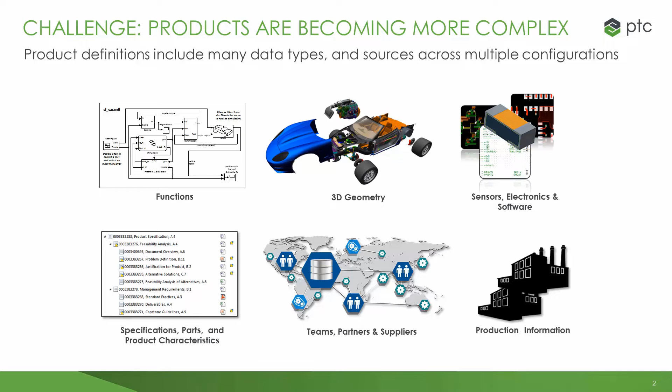Errors in this crucial part of the product definition lead to delays, frustration, cost overruns, scrap and rework, and poor quality. Many roles are involved in the creation, editing, and consumption of all this essential product information.

If you just consider the design functions alone, there are many teams that will be involved, from mechanical to electrical to software and to quality. Beyond that, there are many other people who either contribute to or consume the information in the engineering bill of materials. This list can grow, and it includes other teams such as manufacturing, marketing, sourcing, sales, and many others.

If you were to map out all of the roles across all the different processes, you'd create quite a matrix of interaction points. Today, many companies struggle with sharing information across these points of interaction due to all the different systems and tools and data types that are used.

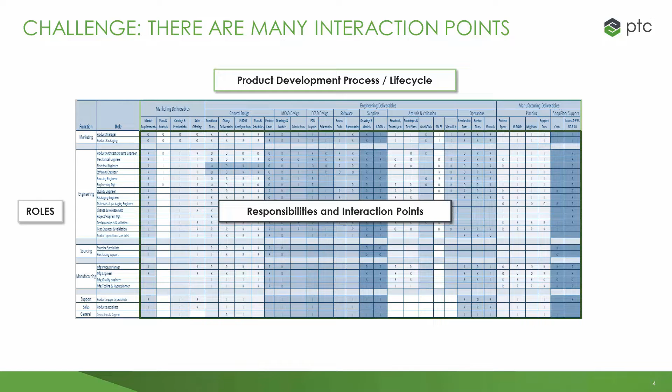This creates many challenges, such as manual translation of data, updating of multiple spreadsheets, not knowing which is the latest version, etc. One customer that we spoke to told us they had 29 different spreadsheets across these functions.

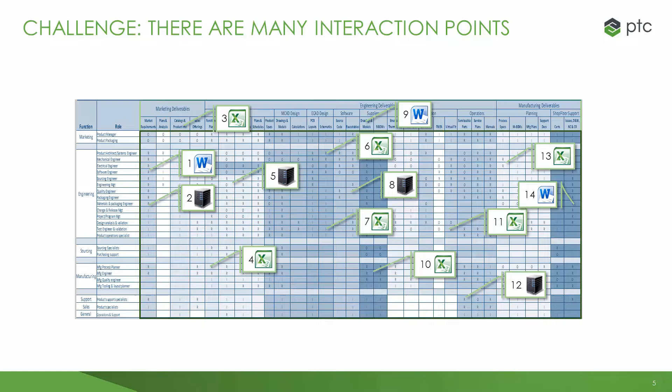In the absence of a comprehensive system for the creation and management of the engineering bill of material, companies have adopted several different approaches. Let's take a look at some of them.

The traditional approach is to include the bill of material on the engineering drawing. This practice evolved naturally with the evolution of paper drawings, but like many paper-based processes, it comes with some significant limitations. The media on which the BOM is created may have changed from drawing board to CAD, from paper to electronic, but the fundamental process has not changed, and that represents a significant bottleneck.

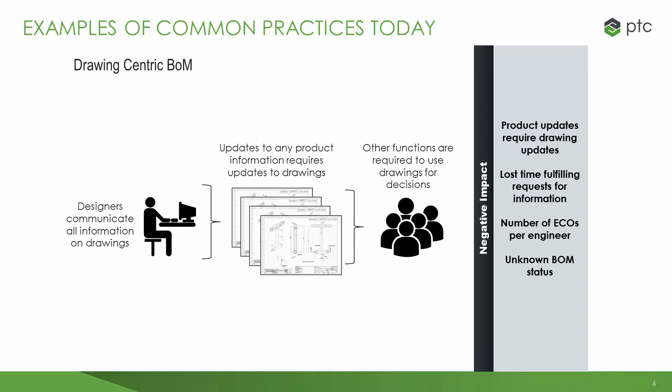We'll take a closer look at the problems that this creates later in this presentation.

Another common practice is to copy and reformat the BOM that is created in engineering into a form and format that's more useful for downstream functions. Often the different formats are sent from person to person via email, resulting in several copies being in circulation. The problems arise when changes need to be made.

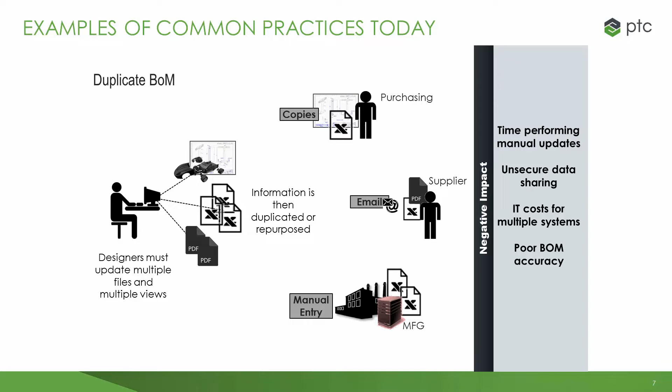Now all of those existing BOM documents have to be chased down and updated manually. This is time-consuming and error-prone, and often results in some people working on out-of-date and therefore incorrect information. In many cases, there simply isn't a standard process for creating, updating, and sharing bills of material information within engineering and within the downstream functions.

The problem's often compounded when companies have grown through merger or acquisition, and as a consequence use several non-integrated processes, some based on paper, some based on emailed spreadsheets. This all leads to delays in the schedule, decisions being made on incorrect or incomplete information, and Herculean human efforts required to assemble a complete bill of material from several sources.

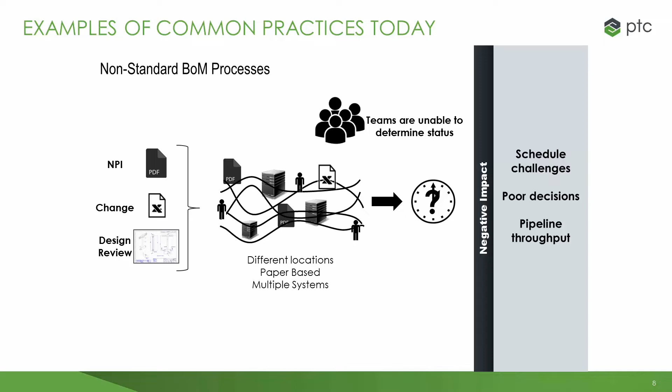Now let's take a deeper look at just one of these approaches, the drawing-based bill of material process. And we'll ask ourselves, what's the problem? And can the process be improved upon?

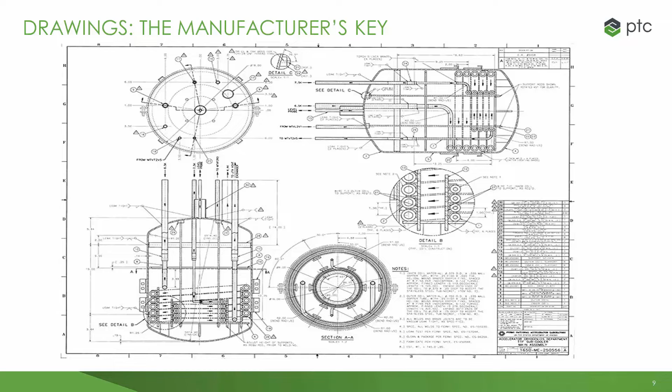Here's an example of a typical assembly drawing, where the bill of material table is placed above the legend on the right-hand side of the drawing. This approach is common, and it has some advantages, and it's been used successfully for decades.

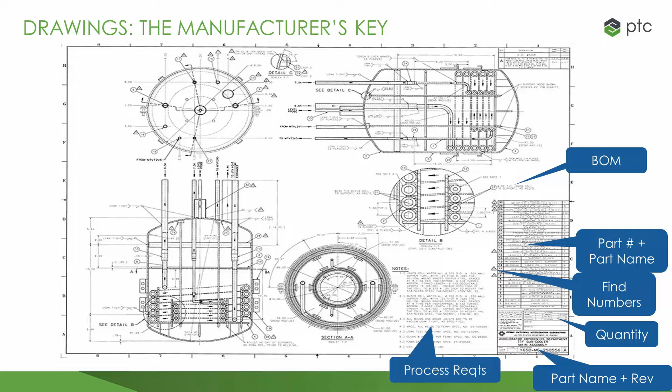But there are some inherent flaws with the approach, which result in a lack of the agility that's required to support today's fast-paced product development cycles. If the goal is to manage a bill of material that is complete, accurate, and reliable, then this is not the way to achieve it when speed and scale really matter.

When all engineering information is centered on the drawing, the process is a two-stage process. Firstly, there's a composition process in which information such as material specs, critical dimensions, parts lists, etc., are all gathered and arranged on the drawing. All of this information must be defined and complete and then transcribed onto the drawing before the drawing can be released.

Secondly, there is the decomposition process, where the consumers of the information must read from the drawing to interpret and extract just the information that's relevant to them. The drawing now becomes a bottleneck, where none of the downstream consumers can receive any information at all until the composition of the entire information set is complete and the drawing is released.

This process constriction is exacerbated when any of the information on the drawing changes. If there's a quantity change, the drawing must change. A process change, the drawing must change. Part number change, the drawing must be changed. Replace a part, the drawing must change. Change a find number, the drawing must change. And so it goes on.

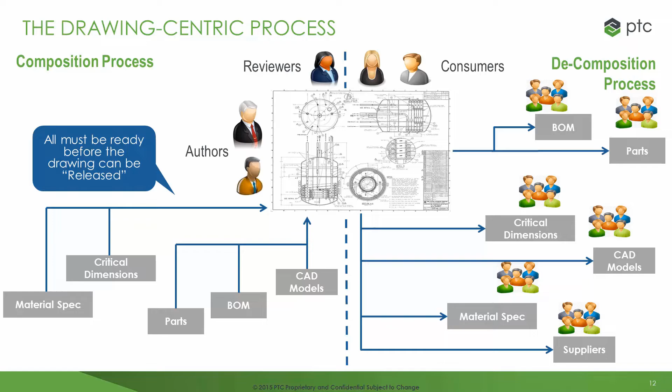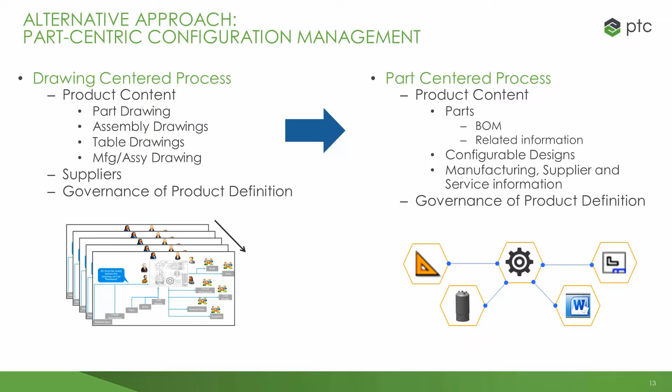If, instead of composing all the information onto the drawing and making the drawing the single pipeline of information, let's see what happens when each piece of that same information is managed independently in a part-centric process in Windchill PDM Link. The same information is created in both processes, but we'll see how the part-based approach avoids the bottlenecks associated with the drawing-based approach.

In this case, information is composed and released as soon as it makes sense to do so. We don't need, for example, to wait for the material spec to be complete before the BOM is made available. In fact, there's tremendous value in pre-releasing an early bill of material that may just identify the long lead time items so that purchasing can begin their planning process with an understanding that the rest of the bill of material is preliminary. This parallel process allows for greater agility while removing bottlenecks and ultimately faster time to market with fewer errors.

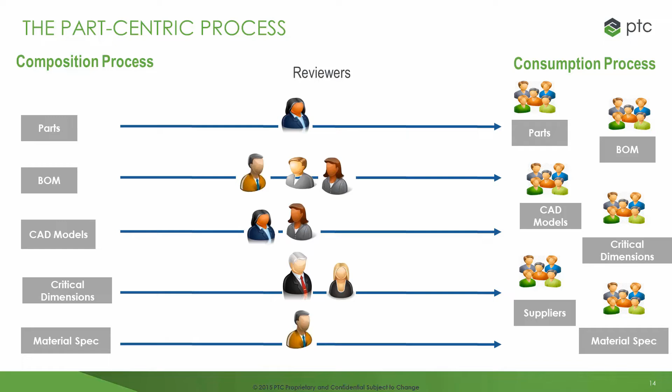Windchill PDM Link provides a part-centric, associative, multi-user bill of material that is a complete definition. We call it an associative BOM because each item on the BOM can be directly linked to all other information such as documentation and CAD models, and it's all managed as a single source of truth.

The associative relationships are created as a natural part of the development process and live with the bill of material throughout the life cycle of the product. The bill of material and its related information is updated as a result of further development or engineering change processes using standardized automated workflows.

And it's accessible to downstream consumers to view the information that's relevant to them at just the time they need it. This results in tangible business outcomes for both the designer and the enterprise, where designers can focus on the design and spend less time searching for information. Parts are reused rather than recreated. Processes such as new product introduction, release management, and change management are optimized, automated, repeatable, predictable, and driven by workflow.

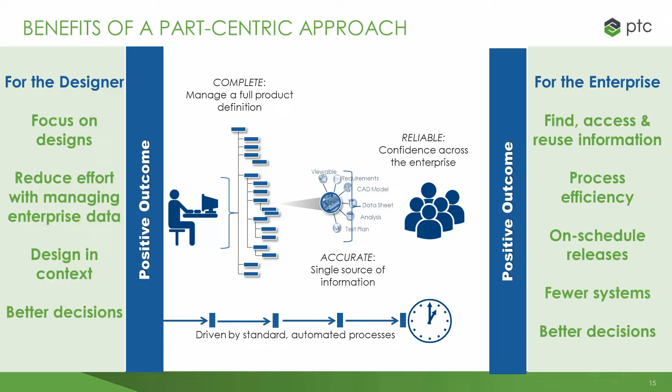This results in better revenue prediction with on-schedule releases and better decisions by everyone, because everyone is using the same single source of information, resulting in less frustration for the team, less scrap and rework, and high-quality products. The Windchill bill of material is complete, it's accurate, and it's reliable.

Let's take a look at how one of our customers, SRAM, used a part-centric approach to address an otherwise unsurmountable engineering problem. SRAM designs and manufactures high-quality components for the bicycle industry.

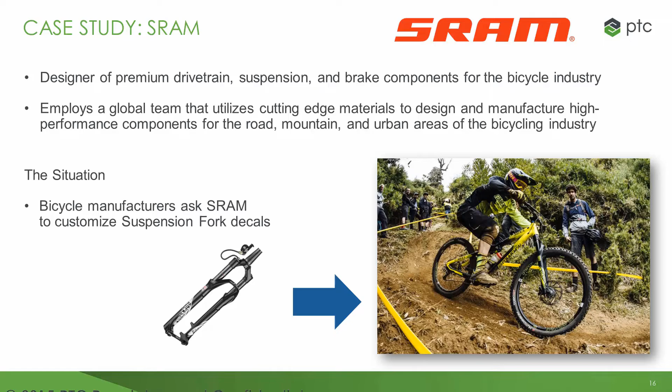When a SRAM customer orders one of their components, they need decals and colors specific to their own branding. The old process for such decals was a drawing-centric process. In addition to the decals themselves, there was a drawing with a table that had a row for every decal kit, as well as for every fork drawing, there was information on the decal kit.

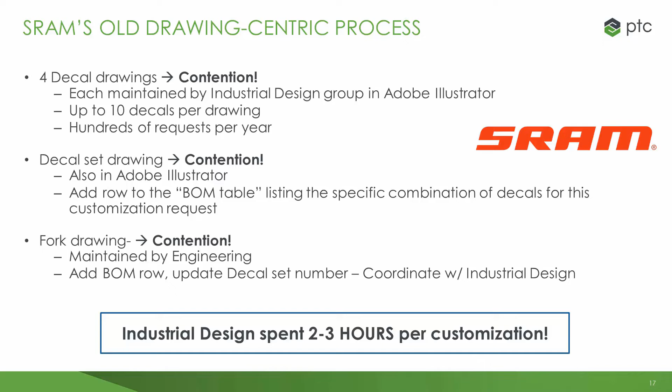SRAM would receive many orders from customers for a custom decal. In this drawing-centric process, they had to update and revise the drawings to add the decal kits, and then go through a change process to reissue the drawings, potentially hundreds of times. Each time, users have to wait for the drawings to continue the process.

By switching to a part-centric process, they now create parts in Windchill PDM Link to represent the decals, and then relate the Illustrator files to the decal parts. They can then very quickly create new parts and a new bill of material for the decal combination. There's no waiting for drawings to update, and the downstream roles now have rapid access to the correct information without waiting for the re-release of a complex set of drawings.

This resulted in reducing the time for custom decals from hours to minutes, and has led to a huge increase in the number of orders that they can process in a year.

In fact, an independent study by Nucleus Research showed that SRAM have gained tremendous value from their deployment of Windchill PDM Link with an annual ROI of 128%, 12 months to pay back the initial investment, and a $1.3 million annual benefit.

Another great example of a customer that's revolutionized their process around bill of material is iRobot. iRobot are well known for their home use robots. Having a single bill of material that's up to date, accurate, centrally accessible, and one which demonstrates the historical development of its products was critical to iRobot.

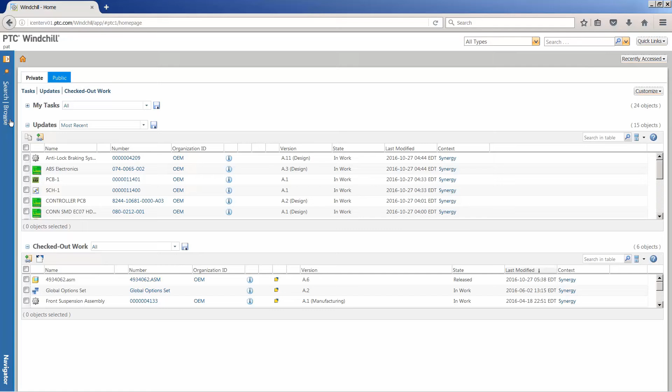Let's now switch to a demonstration, and let's take a look at what the bill of material experience is like in Windchill PDM Link. In this demonstration, I'll show how Windchill PDM Link from PTC provides a complete view of the design, including mechanical, electrical, software, and related documentation, as seen through the lens of the associative bill of material.

We'll use this car as an example, and the first thing you'll notice is that we don't just have a bill of material, but we have a complete, correct, and reliable bill of information. Here we have all of the information associated to the BOM that's used to describe the complete product.

Let's take a look at the BOM structure, which, as you can see, includes many types of data. I can select parts from the visualization pane or the structure pane and see the corresponding parts cross-highlighted.

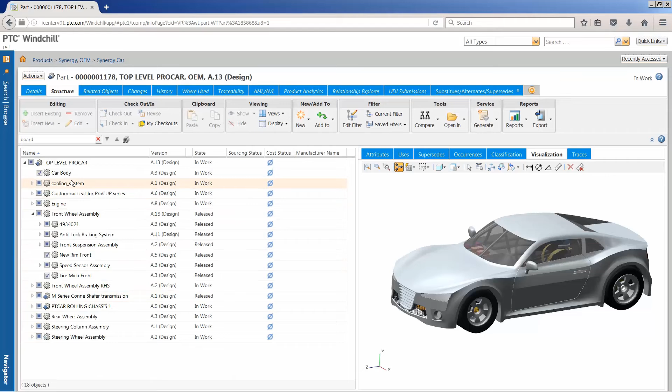Combining BOM and CAD management into Windchill PDM Link allows much of the BOM to be generated automatically from the CAD structure. When I'm investigating an assembly, such as this wheel assembly, it's important that I can quickly view all of the information that describes it.

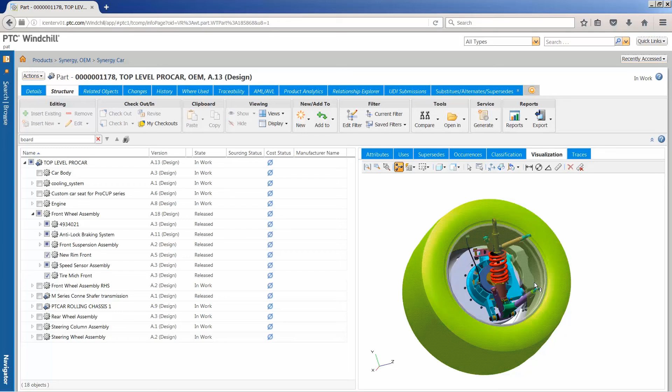In this case, when I expand the anti-lock braking system, you can see what looks like a traditional bill of material. But when I choose to show all related content, you'll see how that is now a dynamic representation of the bill of material or bill of information, which captures all of the digital content of the product as it evolves. From here, I can view all the different information in the product design, such as electronics, schematics, 3D assemblies, drawings, calculation documents, instructions, test results, ECAD, software, and even the plant from which it's to be manufactured. This allows complete traceability to all of that data as the design matures and moves from concept to release.

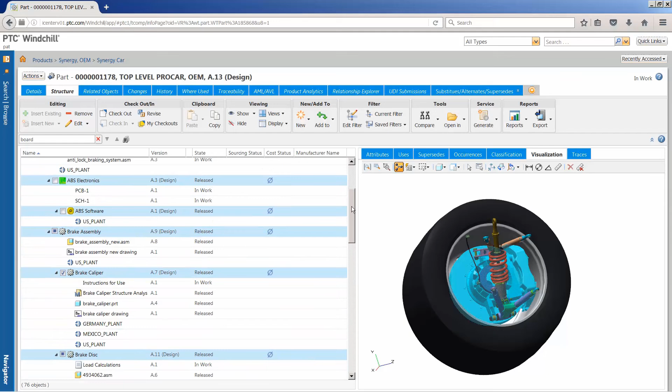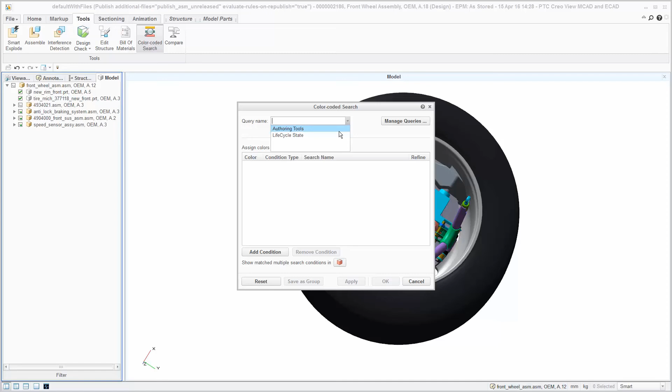Because I have all this information related to the BOM, I'm able to take advantage of all of this information directly in our viewing tool, Creo View. Here I can interrogate, mark up, measure, and even perform color-coded query searches on things such as the authoring tool used for the design, or on the life cycle state of the parts, allowing me in this case to visually see any parts in my assembly that are not yet released.

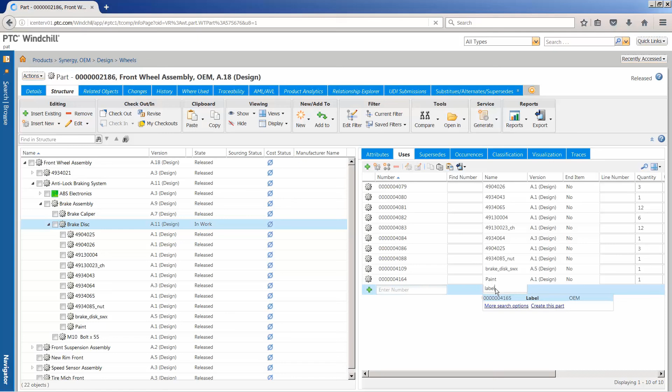I'd like to show you just how easy it is for an authorized user to edit the bill of material directly in the Windchill system. I'm going to add a label to the bill of material. And since the label is an existing standard component, as soon as I begin typing the name, the system searches for and offers me that label as an option.

Once the label is added to the bill of material, you can see that the label, as well as any subcomponents to that label, have been added as well. Since I've changed the structure with the addition of the label, I now need to check this in and document the change.

It's very easy to send BOM and structure information from Windchill PDM Link to other systems such as ERP. This can either be transmitted automatically or it can be exported manually through the export tool, which supports common formats such as XML, XLS, CSV, and many others.

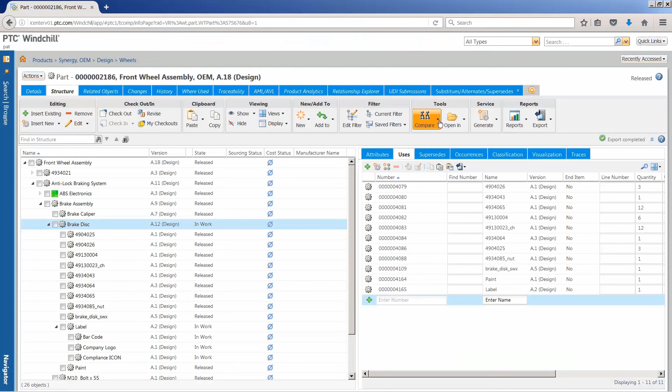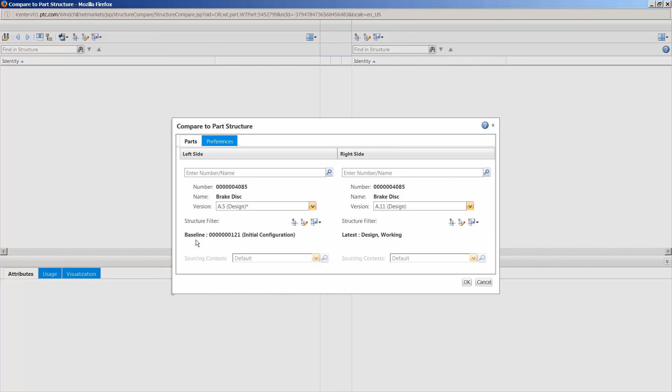As the design changes over time and parts are added or removed from the design, Windchill PDM Link maintains the change history and provides tools to compare the various versions. The BOM Compare tool allows me to easily compare the latest version of the BOM with earlier versions, or even compare the EBOM with the MBOM or the SBOM.

In this case, I'm comparing the latest version with a baseline. As you can see, it's very easy to identify changes that have been made to the brake assembly, both graphically as well as through highlighting in the BOM structure.

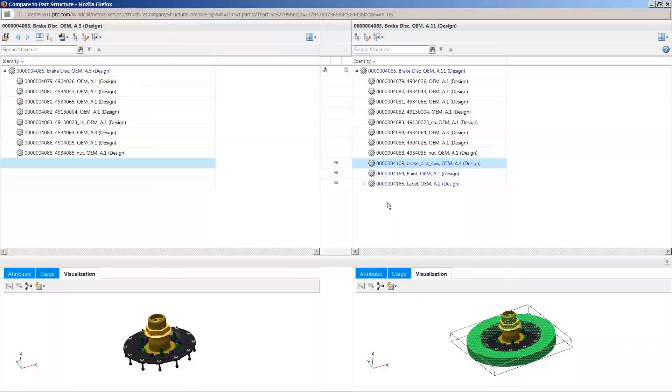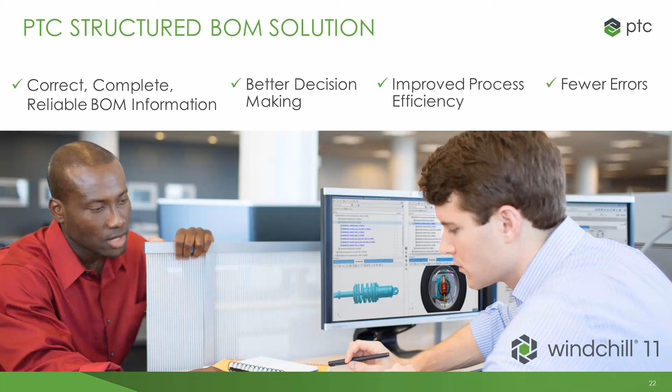In summary, PTC Windchill allows you to manage an associative bill of material that is always correct, complete, and reliable, that leads to better decision making by ensuring that everyone has access to the right information, improved process efficiency by removing bottlenecks, fewer errors resulting in costly time delays or scrap and rework.